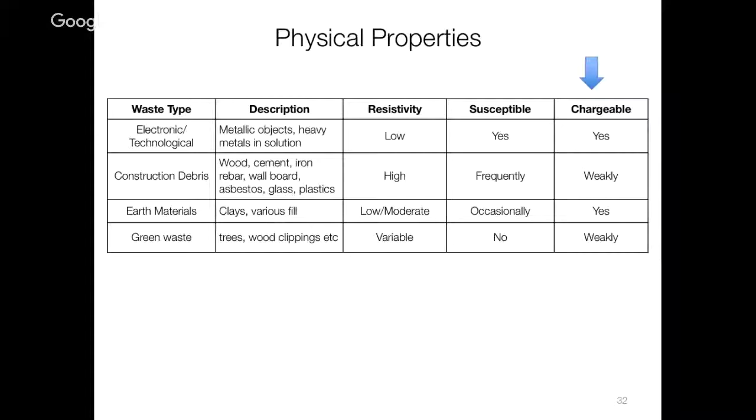Magnetic susceptibility is a little bit all over the map. If you've got scraps of iron, or construction debris from rebar or metallic material, then magnetics is good, but for earth materials and other stuff, not necessarily. But the one thing that's come up over the last couple decades is that most of these materials could be chargeable, either significantly or weakly, relative to the country rock.

So these slides were actually taken from a leading edge paper by Zonge Geophysics, and the only purpose for them is just to show what the images are like. We talked yesterday about pseudosections and going from pseudosections back to recovered resistivities.

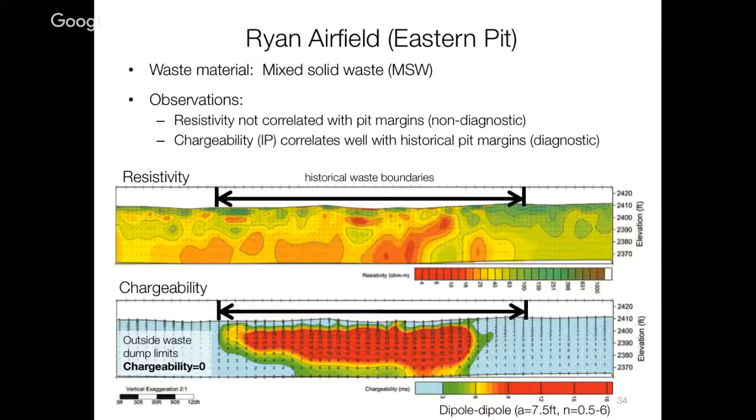So the point is there's chargeable material up here, but it might not necessarily have a really low resistivity - there's not a one-to-one correspondence. The only thing that's known here is the limits of the waste dump, and here's what you get in resistivity, and here is the IP. The fact that the IP is kind of coming up close to the surface is perhaps good. That was one with mixed solid waste, and this one's got construction debris.

They wanted to do test drilling to see if those readings were correct, but they didn't want to actually drill on any place that had chargeable material or that they thought was waste, because they were worried that just putting a drill hole through might contaminate things. So they thought it was kind of interesting. They took these images and drilled right beside, hoping not to see anything, and they didn't. So there's chargeable material, but it's not here.

The first time I read that, I thought, okay, what's that? Seems like a hard thing to sell to someone. Yeah, we drilled exactly where we thought it was, and it wasn't there. Yeah, that's a good job. I'll pay you double.

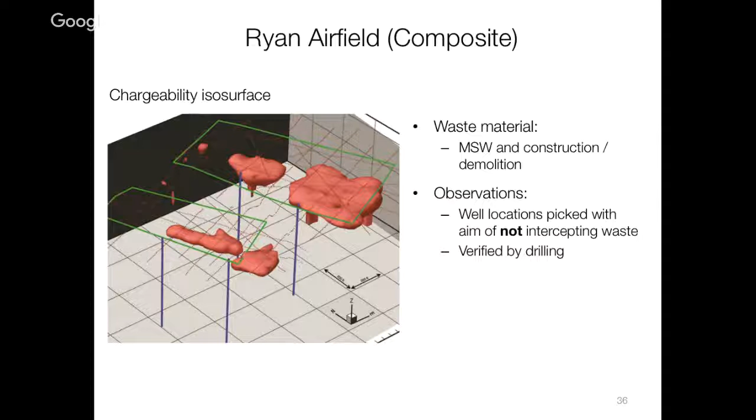So here's another example, and actually this type of example we see in a number of places. Basically what you probably had was a flat area, maybe a hill, and then they just kept dumping stuff in as time went on, and you end up with a final topography that looks like this.

The color scale is resistivity, so the red is low resistivity. You can see there's low resistivities here, and low resistivities out here. The contour levels are the chargeability, and you can see that it's coinciding with this region. You can see smaller stuff out here.

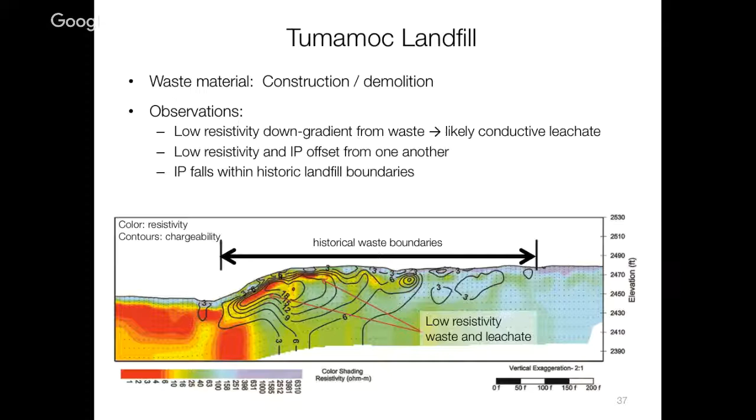The point is that the historical boundaries of the waste are nicely delineated by the chargeable material, and all of this low resistivity up here is not chargeable, and that is very likely the leachate. What happens is you get stuff that's here, water goes through, takes out a lot of metals, and brings it down here. This is the stuff people are really worried about, because it's potentially going into the water supply.

And then with the case of organic waste, resistivity kind of showed that up, but it still had a bit of a chargeability signature, which is kind of interesting. Why are leaves and organic waste chargeable?

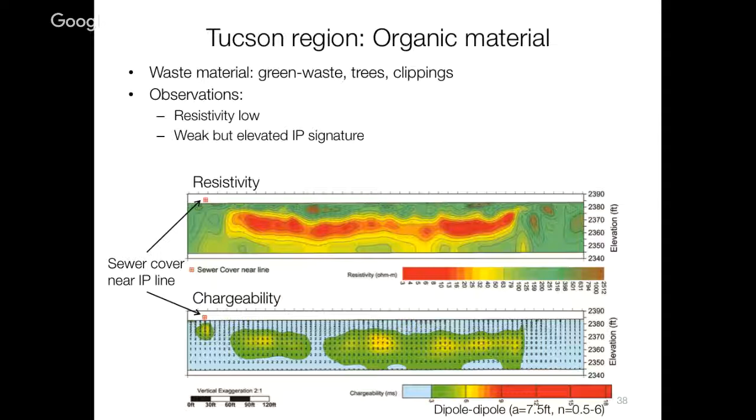So I'm asking, it's not the pore fluid that causes the IP, but it needs to be the material in which the pore fluid is that causes the IP. You can have restrictions like this. Right, it's a combination of the fluids and the matrix. But the contaminated fluid wouldn't cause IP by itself. Right, that's great. What's interesting with the chargeability is that it's such a defined cutoff compared to resistivity. It's really is or isn't, versus higher or lower resistivity. And that's really the take-home point here.

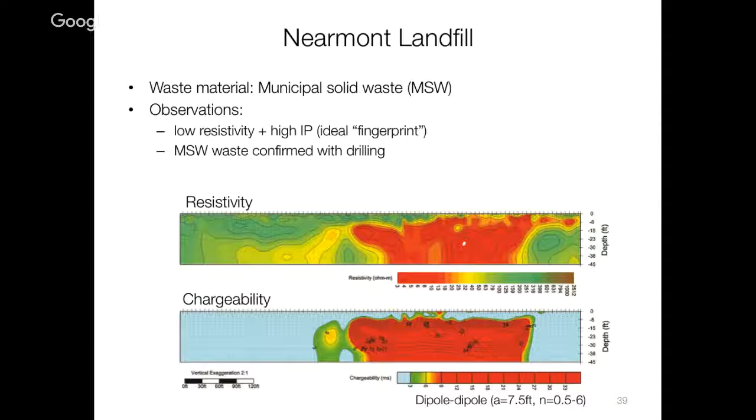Here's one that's probably kind of like an iconic example. This is what people were looking for, right? So the waste was over here. Don't have that one, and so it's low resistivity and chargeable, and they coincide. Somebody was mentioning about having to do monitoring, was that you for the landfill?

Yeah, so here was an example with municipal waste. There was a 2003 survey, and this is the IP obtained when they first started to reclaim the area. So that was the initial IP, and then they did a 4-year biodegradation program. They had air sparging and different kinds of things they were trying to clean the place up. And I think it was 2009, two years after the remediation, you ended up with a chargeability section that looked like that.

So that was kind of nice. From the point of view of monitoring, perhaps even a surface IP experiment done over time can help you see how well you're doing.

What would have been the reason that it's less chargeable after the treatment? Well, that means whatever treatment they're doing is good, right? I think they were maybe flushing stuff out, gradually getting rid of the concentration of dissolved material, removing small things, so the solids stay the same. And IP is associated with the solids somehow, with the matrix.

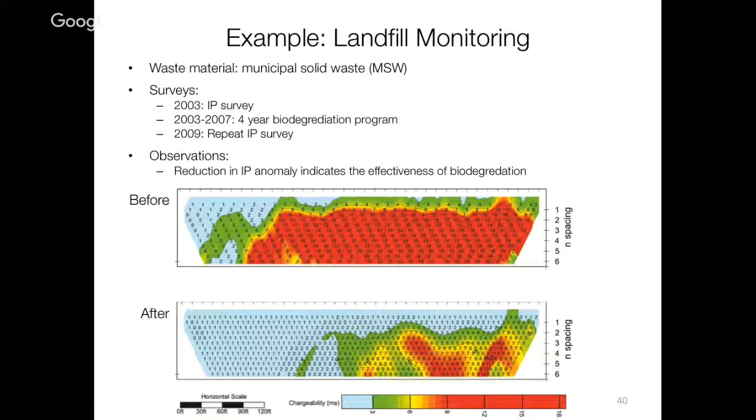So I think it's actually probably fairly complicated when you really look at it, but these are field measurements, and the thing that comes in here is that if you just look at face value as far as resistivity, sometimes there's a correspondence with the waste, sometimes there's not, sometimes the material is high resistivity as opposed to low. So it's an indicator, it might work sometimes, and it has worked. But the IP just seems to be a more consistent thing for a whole bunch of different kinds of environments.

Could you say you need charged particles in the pore fluid in order to have IP? Well, you always have ions in the pore fluid. So if it's polluted, you have maybe more of those particles than otherwise, and maybe that makes the difference. That's the difference in concentration. Yeah. That's a good point.

So now I think this next case history might kind of resonate with you. This is an area that was a landfill for 10 years, sort of 100 meters by 100 meters, and it was basically sludge from some waste treatment plant, with an estimated volume of about 65,000 cubic meters. But when they did it, there was no containment, no way to capture the leachate, no isolation of the system. They just dumped it. And the current state is that the landfill has got lots of iron, hydrocarbons, or organics.

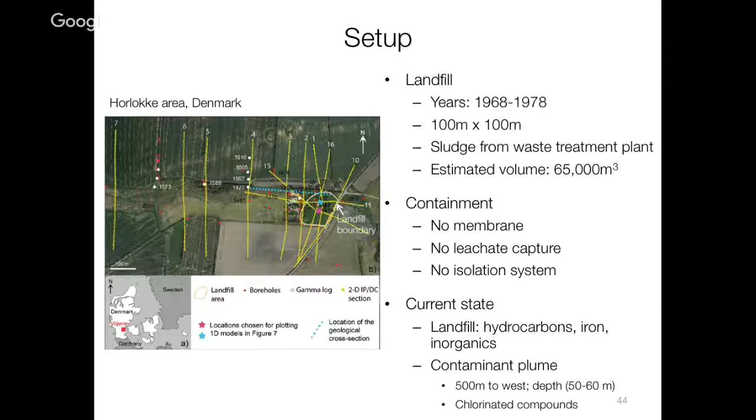So they've done a fair bit of work. They've got some boreholes in here, taken some gamma logs, done some DC resistivity, and the general setup, maybe there's parts of this that are kind of similar to what's happening in Poland. You've got sort of an upper clay layer in the top couple of meters, then there's a waste layer, and then sand and gravel kind of interbedded in here, and maybe some aquitards coming in.

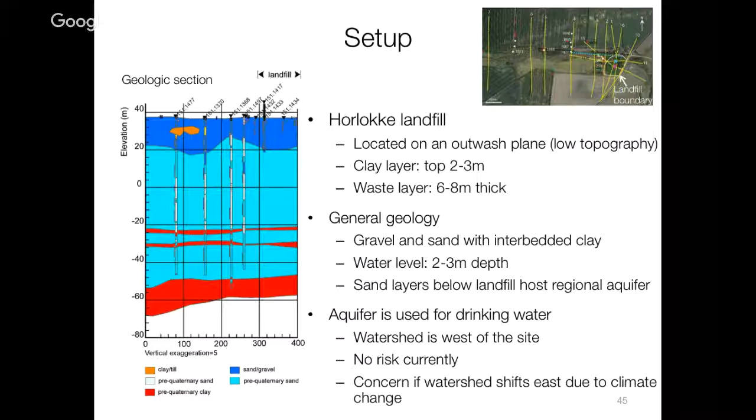So the aquifer itself is used for drinking, and currently the landfill area is kind of away from the area where they're extracting the water. So it's not really of concern right now, but their concern was that if the water table actually raised up, there might then be more of a connection, and a lot of the material associated with this waste dump could come through.

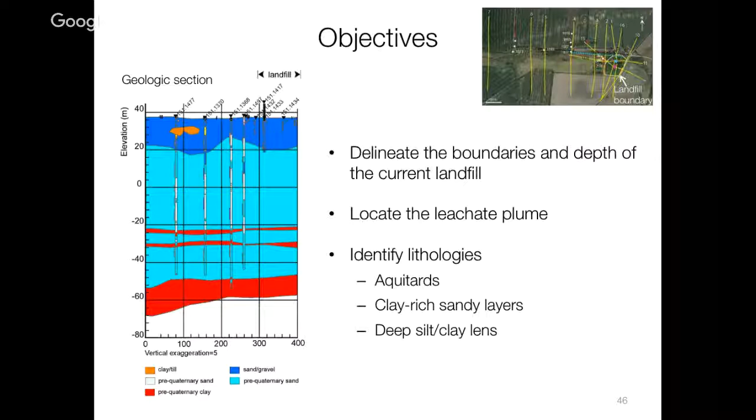So that's the objectives: basically delineate the boundaries of the landfill and the current depth, locate a leachate plume, and also identify lithologies of aquitards, clay-rich sand layers, and maybe a deep silty clay lens. So those are kind of the objectives, and the properties of these different units are given here. There's also a gamma log that was taken, and the gamma logs are basically associated with high values for the clays especially.

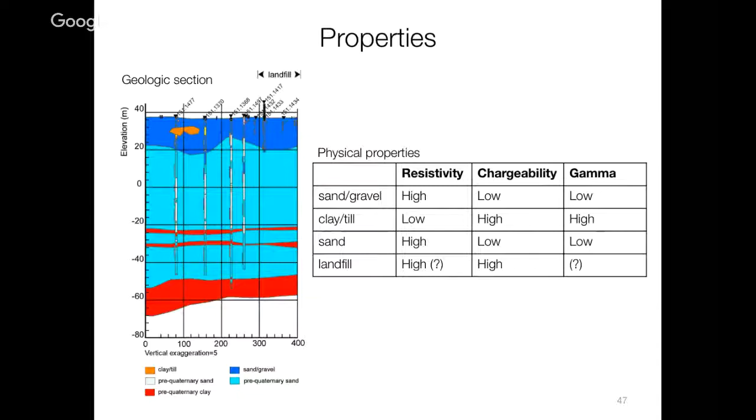The survey was a time domain IP, just like we talked about yesterday. So you put the current on, voltage rises, turn it off, and then this decay curve that's coming in, everything there is connected with IP.

The IP data that they used is an integrated value of this secondary voltage over time channels, and so that's their IP data. There's 11 lines of data, and 20 time gates per receiver.

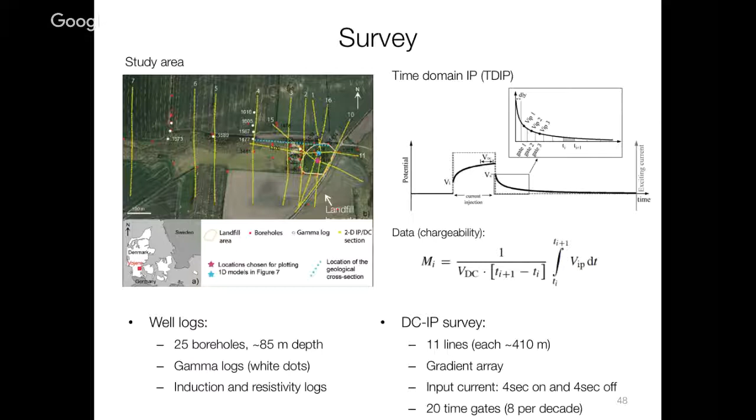So they had 25 boreholes, and there's a number of holes in here at which they've actually got the gamma logs. Any idea what the first time gate would be? No, they didn't say on that.

So the inversion and processing is done a little bit different than what we were doing yesterday. I was sort of advocating a two-step process, where at each time channel we invert each time channel individually, and we get out something, sort of a pseudo chargeability. Remember that curve where somebody asked whether that chargeability curve was typical or not? I said it really comes from a Cole-Cole model.

So here's a representation that's very common for the complex resistivity part. Rho naught is the resistivity at DC, M naught is the chargeability, intrinsic chargeability between 0 and 1, and tau is the time constant, and C kind of encapsulates the frequency dependency.

So this is the description of the complex resistivity, and you can formulate the inverse problem so that you have a number of layers, and each of these has got its own suite of parameters. So you've actually made the problem more challenging now, because now every cell has got 4 parameters associated with it.

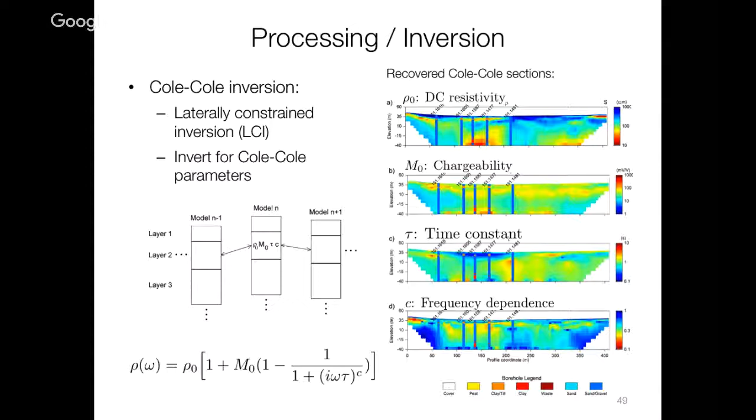The layer boundaries are fixed or also variable? They're variable, I think, too. They have... actually, I'm not sure. Maybe they might be part fixed, part of the inversion. Yeah, it's all part of it. Sometimes they set these problems up so the layer boundaries are fixed, and sometimes so the layer boundaries can move. I somehow suspect that these are fixed, because I think at some point I remember reading that they were doing 25 layers, which definitely would mean that they were fixed.

So you can't read that. The landfill area is this, and then there's basically four lines of data that go through there, listed up here. The important point is that as these lines go through, the data is inverted, and here's the chargeability section obtained through one line, another line, another line. And these arrows indicate, from a historic perspective, where the boundaries of the waste dump were.

You can see that the inversion for the chargeability has done a pretty nice job in delineating that. Now they can interpolate the chargeability section and get sort of a 3D representation. And then you could use a cutoff value, which they used here, 100 millivolts per volt, and that gives them this as an estimate of the volume of the waste.

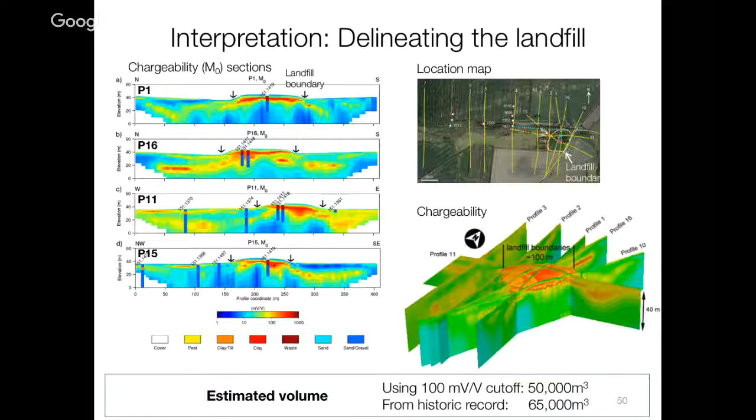And actually that number came up kind of reasonable, like 50,000 cubic meters. Of course, that will all depend upon a whole bunch of things, what the isosurface level is and stuff like that. But as a first shot, that was actually a pretty interesting comparison. So that did a good job on locating and finding the volume.

And then there was the aspect of interpreting the different lithologic boundaries. So the first one is a clay layer. Clay has got a low resistivity and a high chargeability and a high gamma.

What we see here on the resistivity section is, the blue is really high resistivities, and the red is low. So if you look in the top region, you see that it starts off blue, and then there's a conductive or low resistivity layer right in here, and that layer is also chargeable.

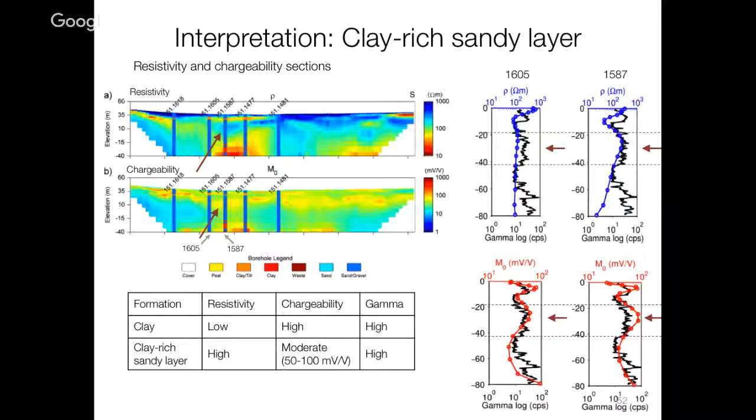M zero and the gamma. Interesting.

I don't think so. Yeah, because the gamma - these two holes are next to one another, so I don't know the interval between them, but maybe not so much. 1605 is here, so it's sitting up, and then 20 meters away you have the other one, and if you look at the gamma you'd say, oh, that's the same clay layer.

Each of those ticks is 50 meters on that axis below. Yeah, actually see that, so it's 20 meters in between. Something like, it's the same clay layer, you would say, for sure.

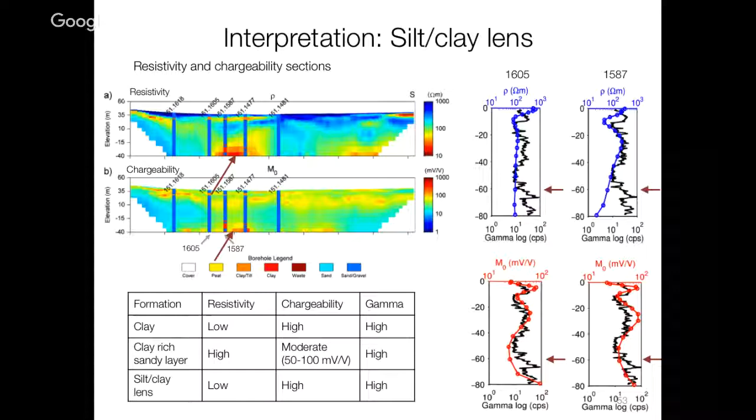So this is low resistivity, very low here, and high chargeability here, okay? But above here, the chargeability gets less, and above here, resistivity is also a bit higher, but it's still pretty low resistivity.

The point about that might have some physical meaning, I think, encapsulated in this diagram they put through, which is kind of a cartoon of what's happening. So here's the waste, and then there's that upper layer here, that clay layer, and they've listed that as an Aquitard. The only reason they gave for that in the paper was that we've got it as a clay layer, and there's a stream up over top of it, so we're thinking this is an Aquitard. I don't know if that's sufficient, but that's basically what they said.

So they listed that top clay layer as an Aquitard, and then they've got this clay-rich sandy layer coming in here, and a clay lens at the bottom, okay? Now, in addition to that, there's this pollutant, this contaminant leachate that's coming down, and it's being truncated by this clay lens, and then it's moving up here.

If that cartoon is true and we transfer that to here, then we'd expect to have higher conductivities or lower resistivities going outwards, sort of above the clay lens, which maybe is a bit more reflective of what this resistivity here is compared to that. So at least from the point of view of a story, which I can't elaborate since it's not our work, everything kind of fits together.

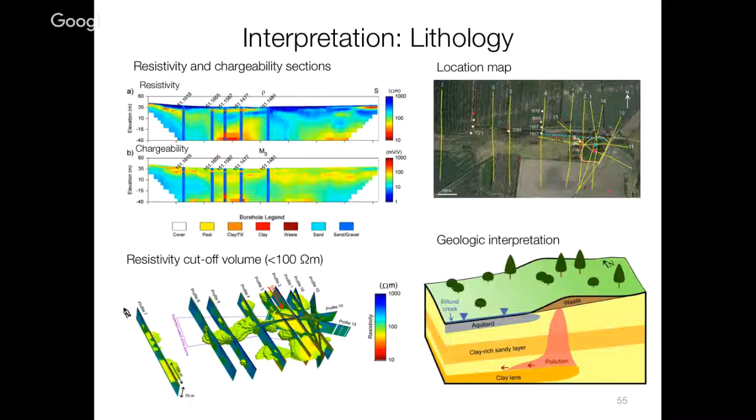The waste dumps are right here. The next slide has taken this same thing and plotted it out on a section. This line coming through here is a section on which they've drilled a number of holes - profile 4 lines right in here. The scale is a bit hard to read in this room, but this shows the highest value of the chlorinated compounds sitting there, and that matches pretty nicely with this.

So they've drilled through and evaluated the amount of metal ions in the fluid. There's a lot of them at a depth that matches where we are here. So part of that plume is definitely the leaching that's coming up.

So I think that's good, right? This is a seriously tough problem, and they managed to go through. They've certainly got the first.

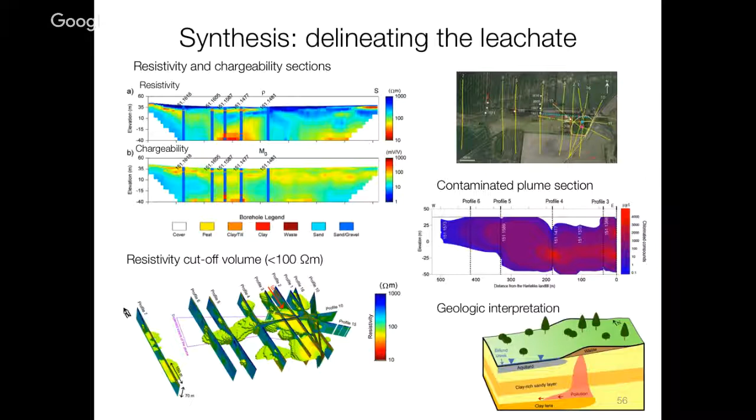I think the first aspect, trying to delineate the boundaries of the waste and the volume from the IP, has been really stable. The delineation of the leachate plume I think they've made just by looking at that high conductivity, low resistivity coming out from the waste dump site. That's probably a pretty good interpretation.

And then their assessment trying to simplify the geology into sands and clays into something that matches the gamma ray, the chargeability, and the resistivity - to me that seemed to be one of the nicer stories we've seen with respect to the use of IP. So I think IP has definitely got a real role to play here.

In landfills, it would be interesting if they could indicate when a repeat survey would be useful - how many years from now would you do a repeat survey to see how the plume has moved? Well, I'm sure they'll do that here because this is an area they're actively interested in. It's now like a test site, so you want to go back and check what's happening.

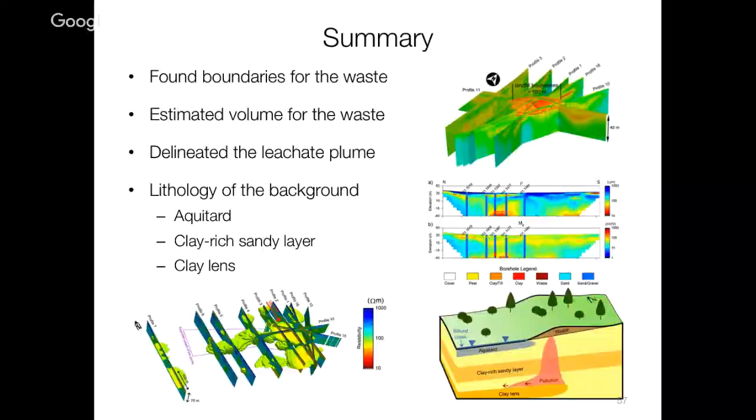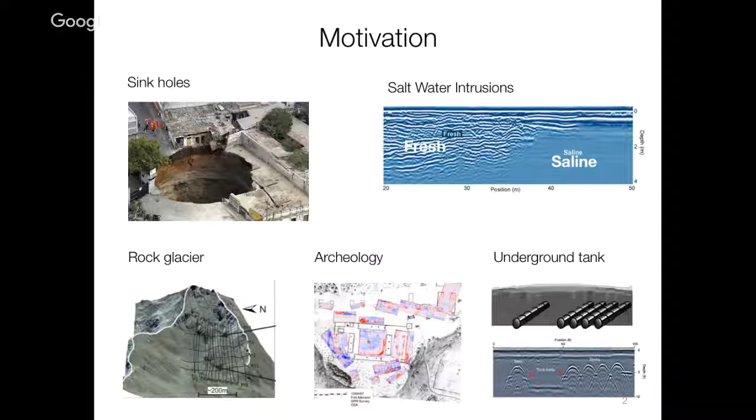Again, we always need motivation, in particular for GPR. It's basically shallow work here - it could be sinkholes, saltwater/freshwater interface, there's been applications for that. A lot of work done in very near surface engineering, geotechnical work, for finding underground tanks, archaeology - that's what we're doing - and rock glaciers. We have a case history on that, but I probably won't go through that.

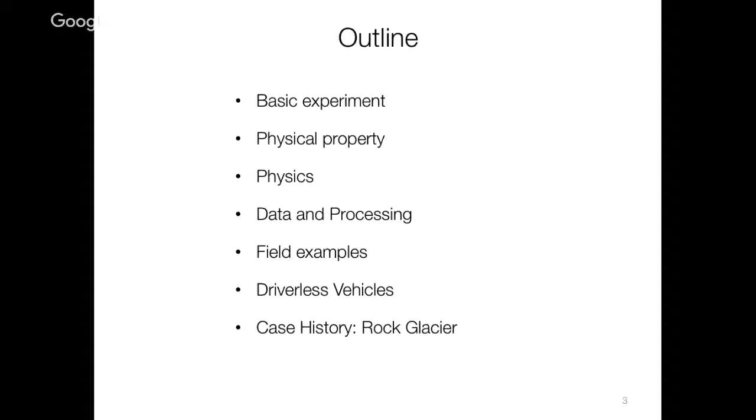So just to kind of briefly go through the basic experimental physics, a bit of data processing, not very much, pretty rudimentary, a couple of field examples, and talk a bit about the driverless vehicles - but it's small. Anyway, so this is the basic unit: we have a transmitter, receiver, so this looks very seismic oriented. In fact, all the pictures here could be a seismic instrument, and we've got rays that are coming down, they're reflecting off, there's stuff that's being transmitted, and in the end you're going to be plotting radargrams or signals that will look pretty much like a seismic section.

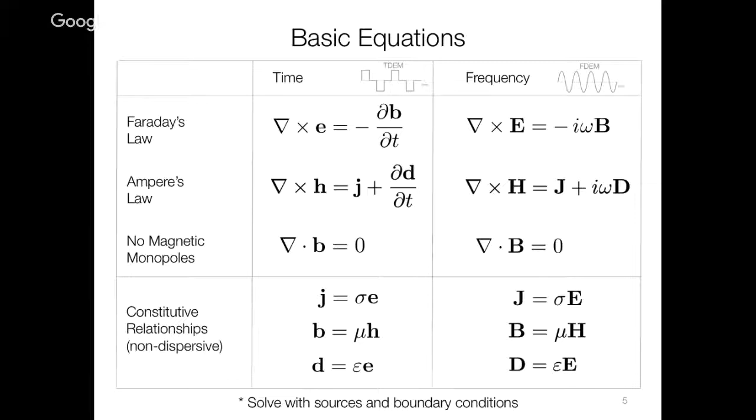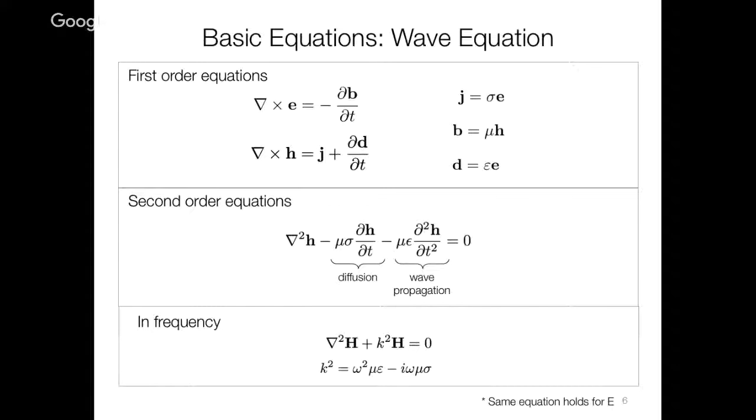So the basic equations we had yesterday, but now the thing that is in grade is this quantity here, which is the displacement current - this is really the wave propagation curve that comes in when you make a second order system. We showed this yesterday: take the first order equations and put them together, and now you get something. This looks very familiar to people in seismology. This guy here is a bit of an annoyance in seismology because it's attenuating things. But what we did, well, everything we did yesterday, because this is so big - basically sigma over omega is much greater than epsilon. This guy, as we usually ignore, but we're not going to now.

The quantity of interest is the electrical permittivity, and the velocity of the electromagnetic wave is the velocity of light divided by the square root of the dielectric constant. So the dielectric constant is really the ratio of the electrical permittivity of the material divided by the permittivity in free space. When you do that ratio, you get an epsilon, which we call the dielectric constant, and it basically varies between 1 and 80. Water is the big kid on the block, and it doesn't matter if it's freshwater or seawater, it has a high dielectric constant.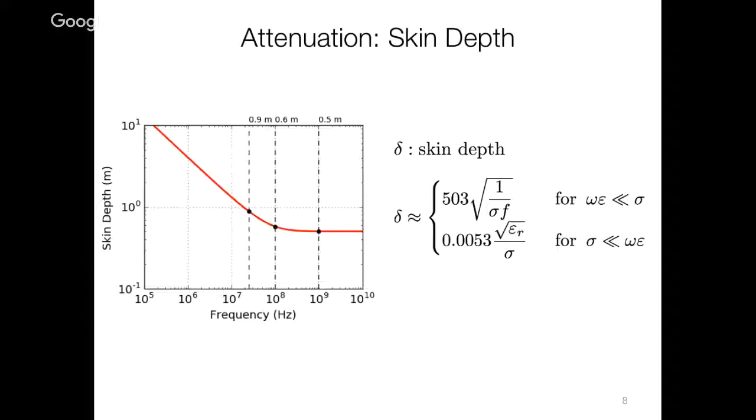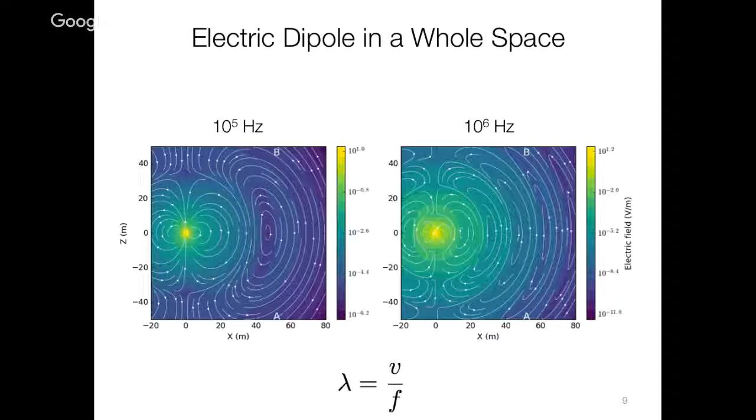Not in the same sense as Rayleigh waves or Love waves or things like that. I don't think so — it just doesn't. But I could imagine some sort of interface wave, like in seismic you have a slower wave, maybe something like that, but I don't know. No, I haven't heard about it. I haven't heard of anything like that. It should be, or it can be — maybe that's low amplitude. No, interesting question.

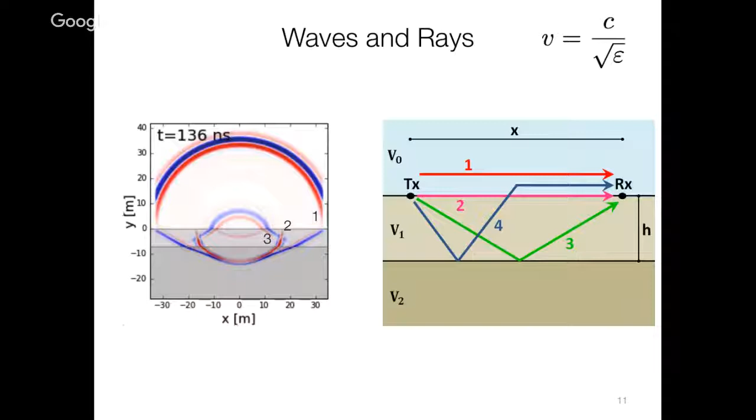So we've got these different ray paths, and you can kind of see what the associated wave front is. But the funny thing is, if we do this for full elastic wave propagation, we get surface waves. I'm curious what the difference is. If we make a movie like this, you can see the surface waves in full elastic modeling. Right, but we don't have particle motion — well, particle motion is like a field.

Something like some components should be zero from the bottom. Yeah, maybe that's the case. It's simply the layer boundary. I don't think... I don't know, we'll have to check. Is there any such analogy here?

For processing, because you're working at such high frequencies, hundreds of megahertz to a gigahertz, even if you're pulling the instrument along, it's recording thousands of realizations of your signal at each time. So you can afford to do a lot of stacking, and that allows you to gradually beat down the noise in favor of some signal. So that's a big thing.

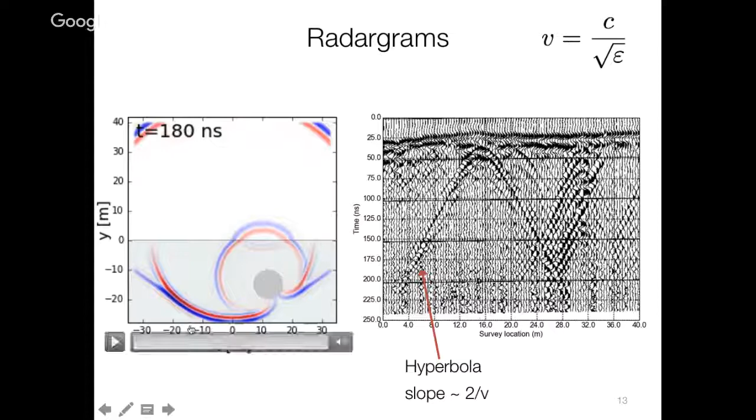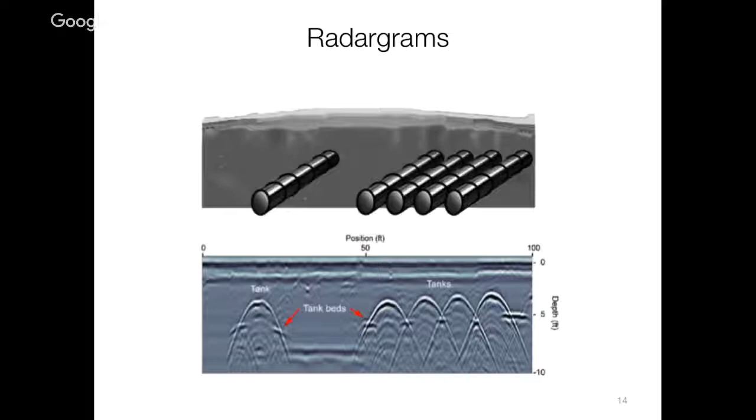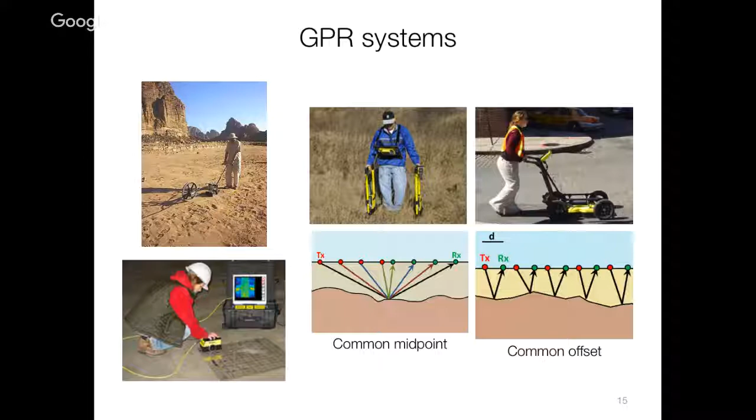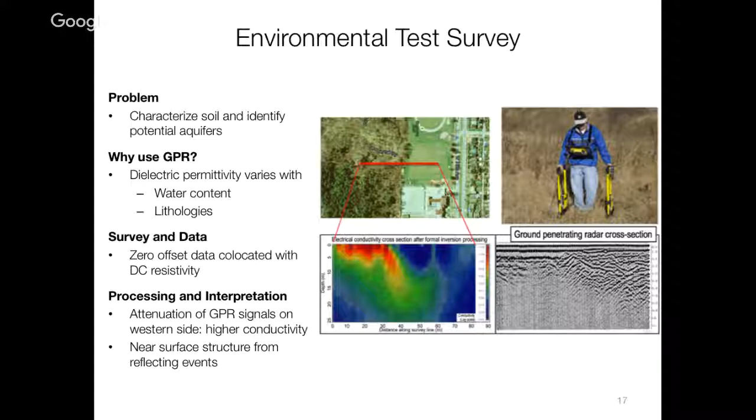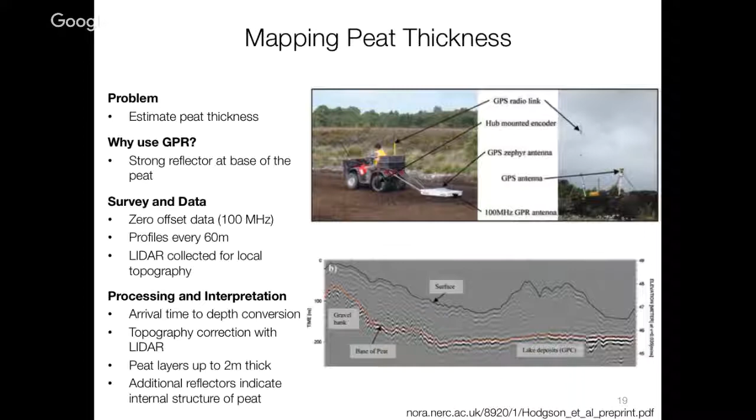Is it still? Yeah. Oh, they still go and dig peat and burn it. Number one source of heating. Not in Northern Ireland though. Carbon footprint, yeah I know. It's not for the whiskey then. Probably also, ah yes, now we're talking. Good, nice smoky whiskey with that Scotch.

Here's one where it was used for water sensing. This is a potash mine in Saskatchewan. You're always worried about water coming in from the top, right? So you have to do the experiment where you put the radar unit sort of up on the ceiling, which interestingly enough, they call the back. It takes a long time to figure out what that was, but yeah, put up on there.

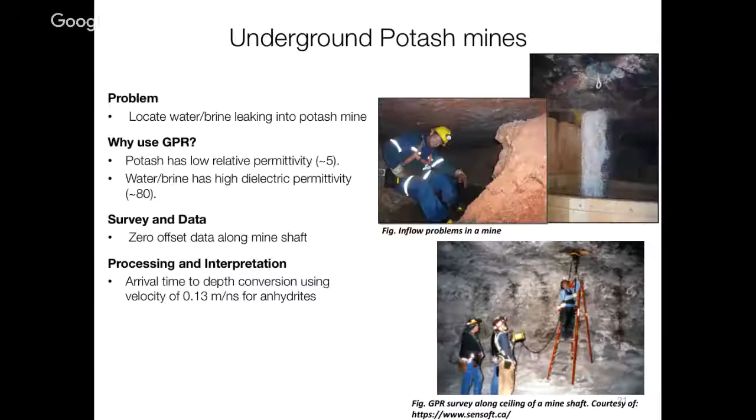So that was it. Oh, I showed you this the other day, but I just thought this is so cool. It's actually one of these things that I think are really important for connecting with the average guy on the street as to electromagnetics. And yeah, it just kind of resonated, and I wanted to show it.

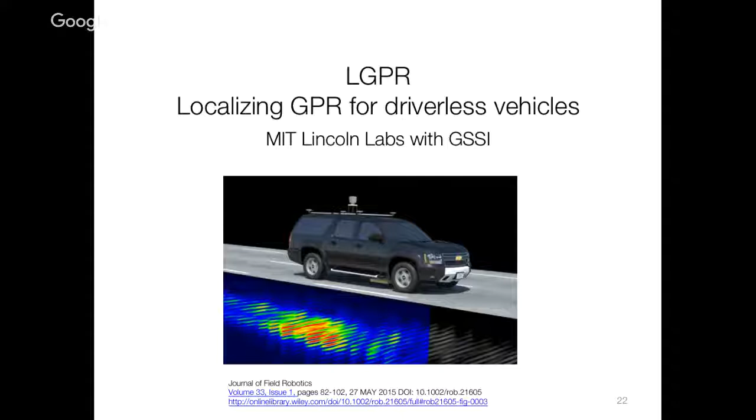So the idea here, this is work that was done at MIT Lincoln Labs - they're concerned about what sort of sensors can be used for cars, especially in bad environments. Here's a bit of an older picture, a bit of an overkill, but here's the car, and you've got where the car is with respect to everything else. So you've got a GPS, you've got a LiDAR, you've got a camera, and these things actually work pretty well in good weather.

But in bad weather, when it's rain or sleet or snow, or something unexpected has come in, something's been changed, or even if somebody is running out, if something has been changed, you might be hard pressed to make sure you know exactly where you are. So the idea was, okay, could we get another sensor? And the question is what you could do as far as having something that doesn't change with respect to those weather conditions.

So the system they got - this is that MIT truck, and there's a GPR unit sitting underneath here. The idea is to do this in two parts. You have the GPR system there, and then you run the car over the road, and you collect basically a radargram of what that road looks like in good conditions. So you collect these data and store them as a reference data set.

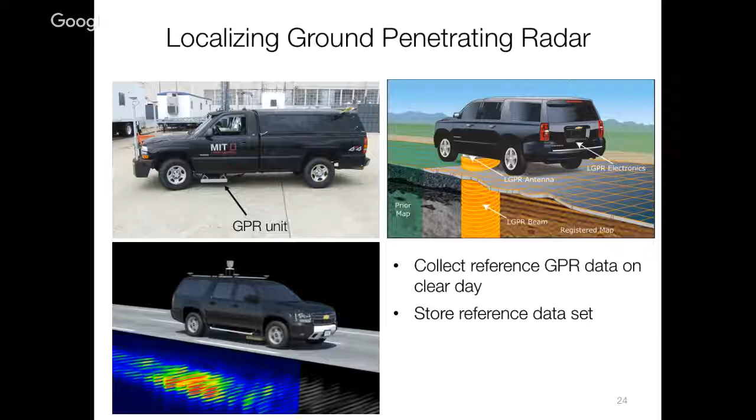That's your test data. So now you come along with your car in rather poor conditions, but your optical sensors are not working so well here, though you can still see into the ground. It's shallow, but you can see down, and that region is not really affected by rain or fog. So now you get this radargram coming in, and you do a cross correlation of this signal with their library signals to find the northing and easting location with the highest quality correlation, and then you know at this particular moment in time I'm really at this spot here.

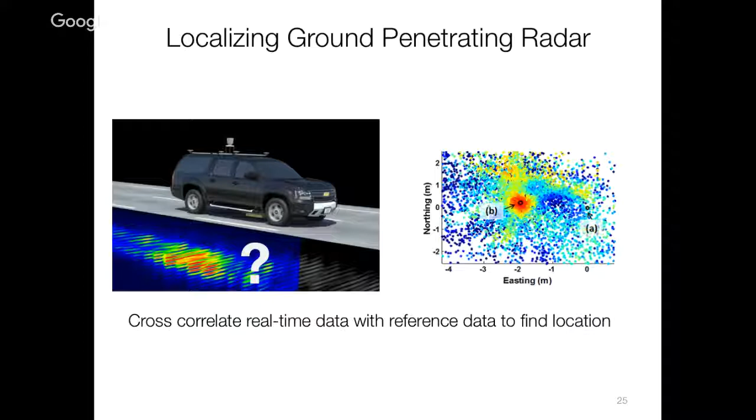Were they able to drive just on that data? So to drive along a certain stretch of road just on that data alone? Next application—like, I understand the principle, but is...

It's great to collect the map of the road. Yeah, it's great for civil engineering, infrastructure monitoring applications. But my question is...

When there's sleet, there's also salt spray. Yeah, so I was wondering, it's a bit of water, or it needs salty water. But they would be looking for the part of the radargram that's deeper as a correlation, hopefully, and that still remains high correlation with the reference library. Yeah, you can get that deep. What's this? Yeah, I got it.

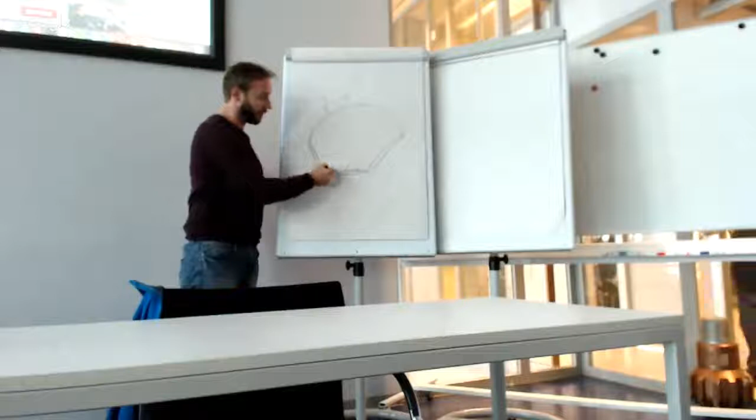It's basically a hole in the ground where waste is filled and then covered on top, so you get a bit of a hill. In the Netherlands, in these landfills, they first put in an impermeable layer. So all the rainwater coming in fills up with pollution, producing leachate, which is collected here in drainage tubes all the time because we don't want to pollute the environment.

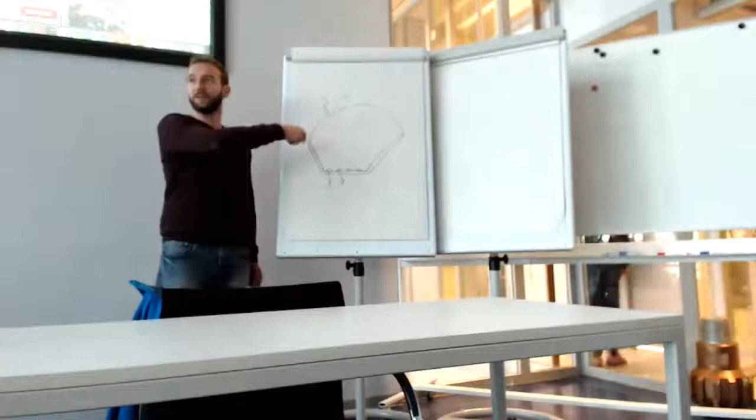Only, this leaching process is very slow. So the way it looks now, we have to collect and clean this leachate discharge for the next 50 or 100 years. So we want to clean the landfill up quicker with treatment methods, so the leachate is clean and we can just release the landfill without having to care about collecting this discharge.

And you're saying that this was actually put together like 30 or 40 years ago, with the liner put in before they start filling? It was in operation for 10 years, I think, and then they closed it off. There are many of these types of landfills in the Netherlands lying around that need to be treated. That seems progressive, at least from a North American standard, that you'd actually put a liner in and pipes to get rid of the leachate.

Well, they incinerate all the waste now here, so. Yeah, now they even go further - the landfills that incinerate were made 30, 40, 50 years ago. They don't have drains, etc. But that's a whole different kind of problem. You have also many landfills without drain systems, but these types are also already 30 years old or so, I think.

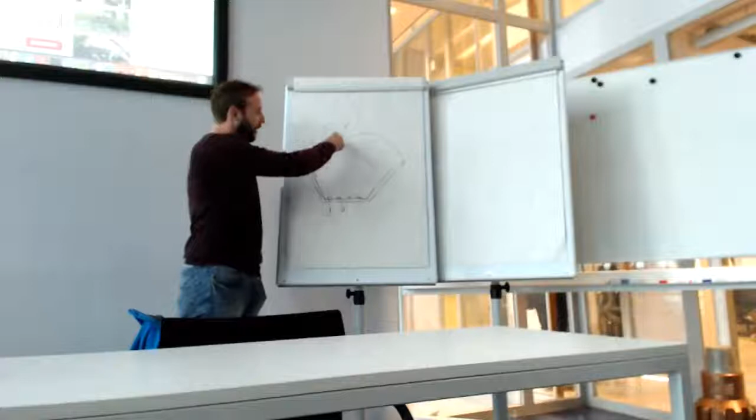And what they are now planning to do over the next 10 years is apply two types of treatment methods. They drilled holes in the landfill and are going to aerate the system, introducing oxygen to enhance the biodegradation and enhance the leaching, so that the organic matrix is cleaned up faster.

And in some landfills, before they start doing that, they will recirculate the leachate. They put it back on top, it funnels through, and the leachate is actually treated in the waste itself - it's really degraded. So in some of them, they first do leachate recirculation and then start the aeration. In other ones, they start the aeration immediately.

I've been working on modeling this type of behavior for my PhD - how the leachate loads up and what kind of leachate you get over time. We developed a model based on the hydrology and the biodegradation inside, which predicts in time what the leachate quality will be. It's important, of course with certain uncertainty, to have these models to be able to at least indicate that the leachate quality will remain low after the treatment period.

So we want to improve this. We have a basic model, but we want to reduce the uncertainty in the modeling, and therefore we need more data. That's why over the next 2 years we want to focus on getting more data through ERT or DC measurements and DTS measurements - the other one is distributed temperature sensing.

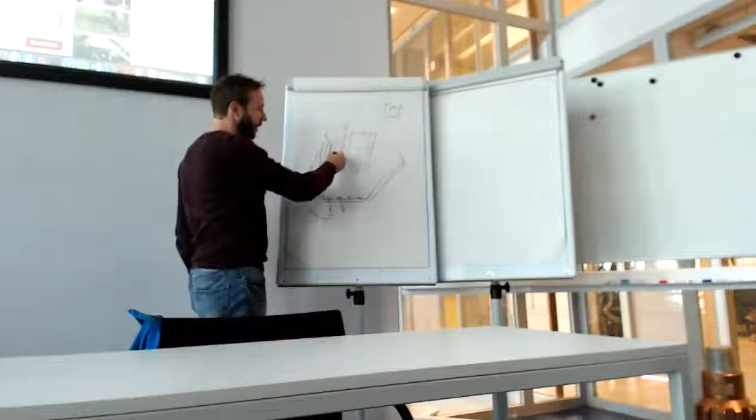Because one of our main hypotheses now is that the water that goes through funnels through preferential flow paths. You also have zones where water is retained, more or less immobile water, where most of the degradation takes place, and then you have an exchange of compounds from these bigger immobile water regions towards the faster flowing water. That's also one of the bigger uncertainties in modeling, so we would like to have methods to map how the water flows through the landfill and where the bigger immobile regions of water content are, and which are more dry regions in the landfill.

So yeah, over the last half year we have been installing these electrodes. We basically now have a grid per pilot - we have 4 pilots where we just have, yeah, here you have the boreholes.

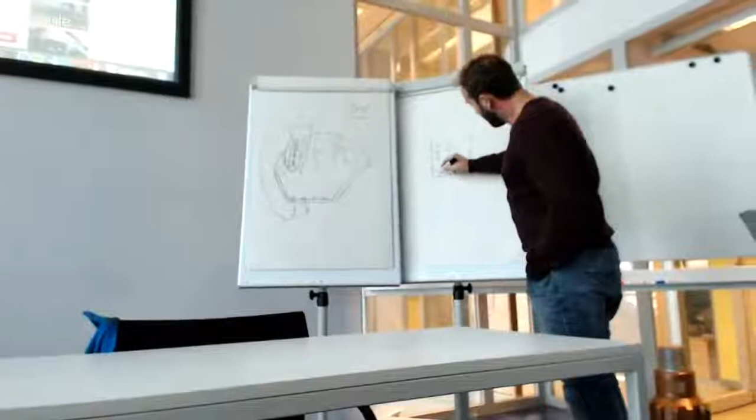We have electrodes every 2 meters. The depth of the landfill is on average 16 meters. That would be very deep for...

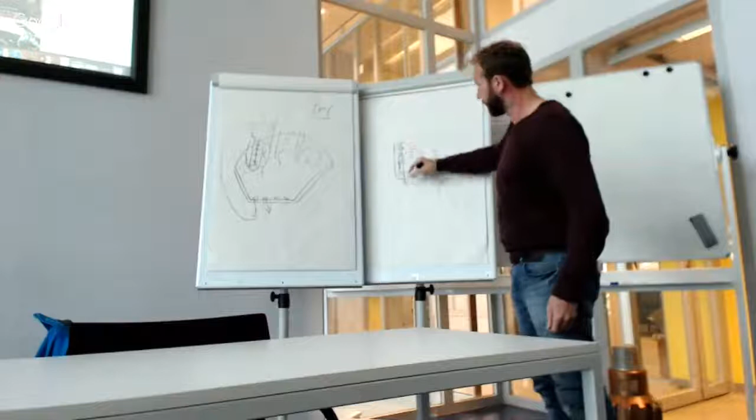We installed optic fiber connected through all the wells, so we can measure the temperature over the whole cable at once. We are now trying out test measurements for the ERT, so we lay a surface line along one line of boreholes, and try to do a spacing of around 2 meters with surface electrodes, connect the whole line and try to get images. But we're still trying to find the best DC or maybe IP method to capture water content.

So the electrodes in the boreholes, are they going to be used as currents or just voltages? Yeah, they can be both. Is that what you're planning?

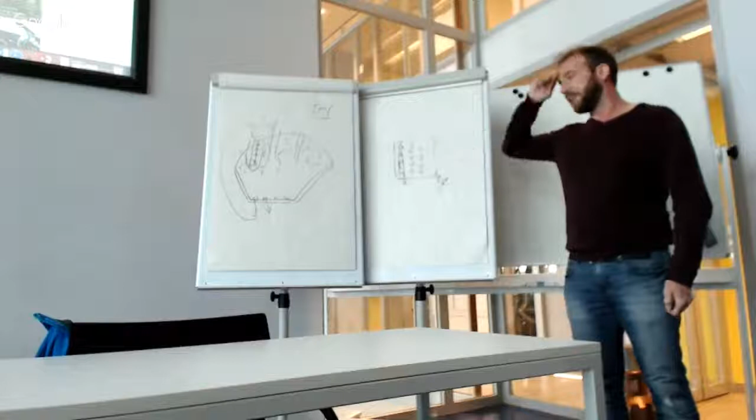It seems to us that intuitively, if you can make sensors with a pair of currents and a pair of measurement electrodes, and scramble it around through the whole system, you get a different current mapping density, let's say. So you get more and more information, but I don't know if that's feasible or realistic.

So are all your electrodes hooked up into a single circuit so that you could fire things off, measuring the potential between two electrodes with another two electrodes being the currents? Yeah, that's something we have.

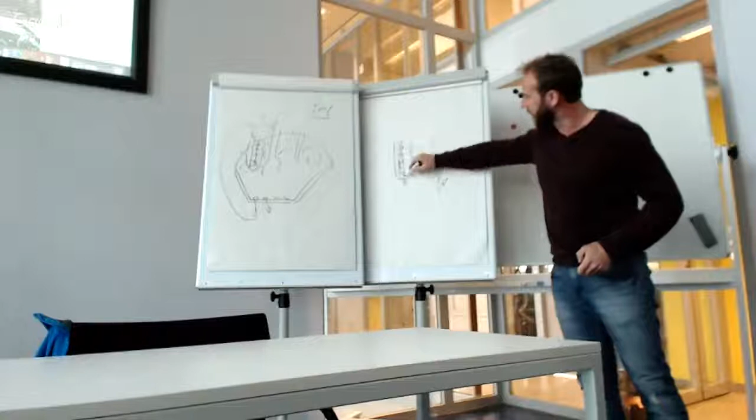We can connect 196 electrodes at once, so we cannot do the complete field, but one line. We can hook up all the electrodes at the same time, and then you activate 4. A master student is working relative to that, keeping it simple.

The master student has been working on trying to find the right combination of injection and measuring points. For now, he keeps one pair of current electrodes, and picks 10, measuring different points, the voltages. Then he does it at many different points, picks another injection point, and measures again.

We're still exploring, since there are so many possibilities. There was a lot of work done on monitoring CO2 in Germany, monitoring the CO2 plume with borehole electrodes, with a lot of assessment on the best configurations for monitoring this plume movement over time, over years.

Florian Wagner is the guy who was doing that work for his PhD. He was a student of Hansruedi Maurer, and now works in Bonn, I think. You will meet him there, and he will have a lot to say about the best configuration, since that was part of his PhD.

That's probably the same kind of configurations. They had only 4 wells with 20-something, 30 electrodes per well, deeper, 900 meters or 600 meters. But they were able to map the movement of the plume over time with the method - the same sort of application. I will definitely take a look at that.

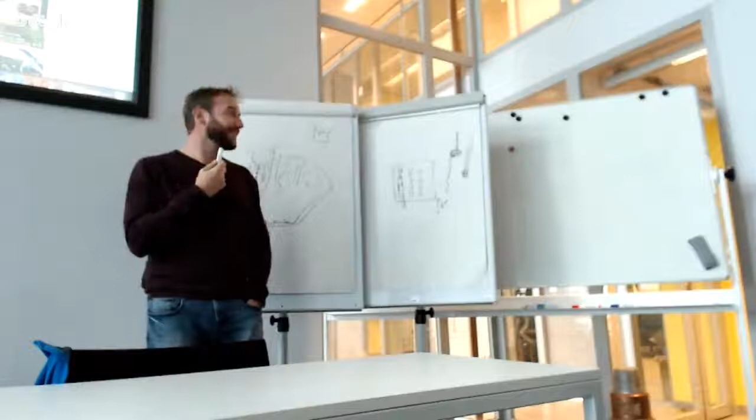I think in Ketzin, when they were doing the CO2 injection, they didn't have a lot of problems with corrosion there. Most electrodes after 4 years are still working fine. So I don't know, it's leachate, it's quite reactive stuff. Maybe it's not a problem.

Just to be sure, if there is a concern with respect to using an electrode as a current electrode, and then soon after using it also as a potential electrode, you sort of need a certain time for the electrode to calm down a bit, because it's charging itself.

So when we talk about monitoring the quality of the leachate, what do you actually refer to? Is it just the number of total dissolved solids, or what is it? How do you know when your leachate's clean?

From the government there are certain regulations about the highest concentration that compounds may have in the leachate before they enter the environment and groundwater system. For most compounds that's okay, they are below this threshold value, but some are way too high, so those are the ones we are targeting. For instance, the chloride concentration needs to be diminished, and the ammonium concentration is too high.

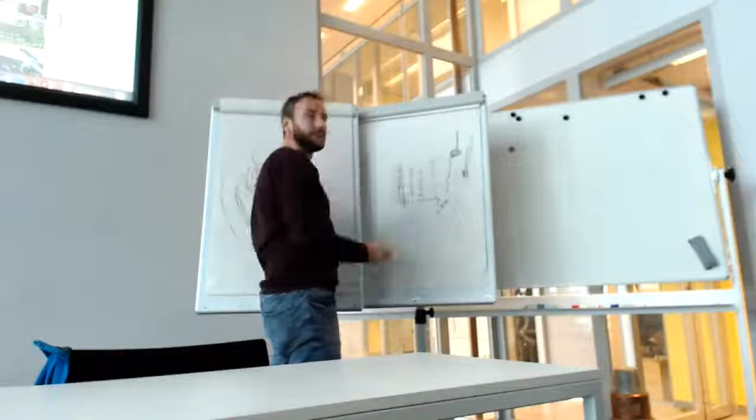So how do you get rid of the chloride through leaching? There's a certain pool of chloride inside, and if you just supply enough fresh water, then you leach it out.

In this phase we can still capture the leachate and then treat it, and you're going to keep recycling it, right? So how do you eventually get rid of it? There will be a bleed stream and fresh water will be added. It's not before it's pure that you put it back in, you're cleaning the leachate effectively as you put more in. Or we take something out and dilute it a bit on top. It's not 100% recirculation.

Any plans of using other methods to know exactly what's in there, as best as you can? Because part of it is modeling, you need to know what's in there. There are not that many methods which allow you to look into the landfill.

While they were drilling, we also took solid samples. We will analyze those, but those are 35 boreholes on 5 hectares. So is there any suggestion on what sort of method you would be using? IP or GPR?

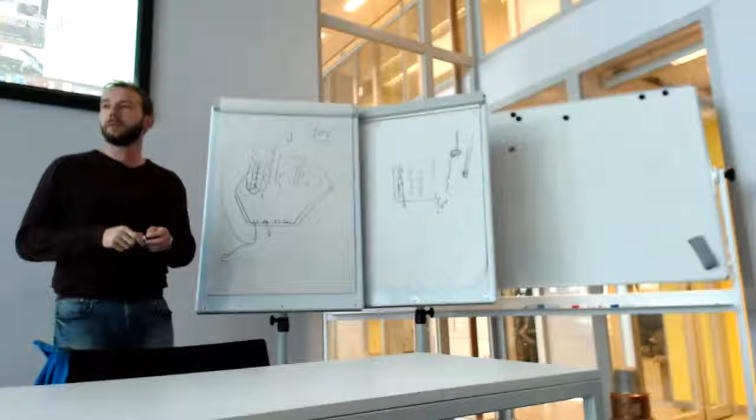CPT tests. The equipment is improving, now they are able to put more and more sensors on CPTs. Magnetometry sensors, cameras, light, and CPT testing is fairly cheap in Holland at least. That's the penetration test. The penetration test itself can give you information, but also if you put a magnetometer sensor on it, it can give you information. Things are developing more and more, and it's relatively cheap, because if you do destructive coring and take samples, that's pricey.

So that might also be interesting, if it's not too expensive. It gives you more information, it won't give you the solution or make your model exact, but it's an extra layer of information. It would be very interesting if we do this and get something out, and then do an additional round of CPT tests on different locations. That might be very interesting.

So what do you think the conductivity of the fluids are, the heavily contaminated leachate fluids compared to the general groundwater that you're pumping in? I think we have on average 10 millisiemens per centimeter conductivity.

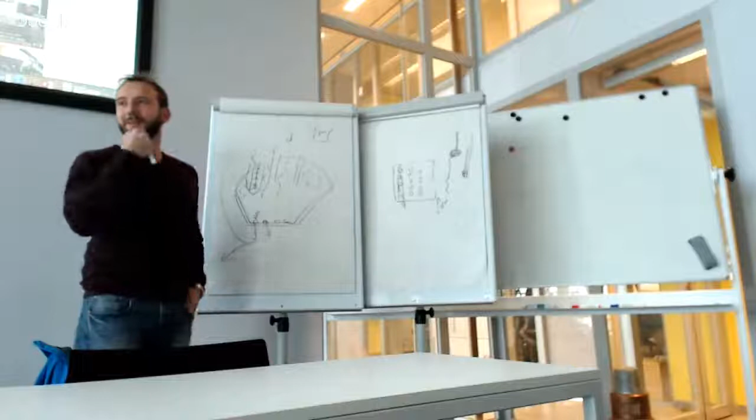At least 16 meters depth, you should get a reasonable resolution, I reckon, or not? Well, you've got boreholes - how deep do your boreholes go? About 2 meters above the base layer. But you're going to get a lot of coverage. The difficult part is that it's a very heterogeneous medium, so the inversion will be tricky because you have very conductive material.

What's the distance between the boreholes? 15 meters.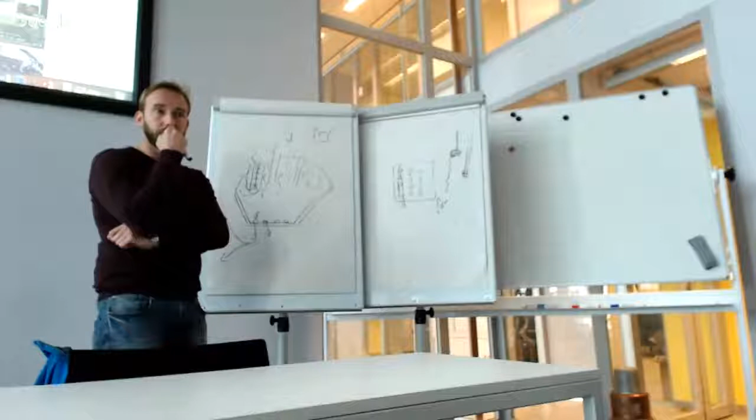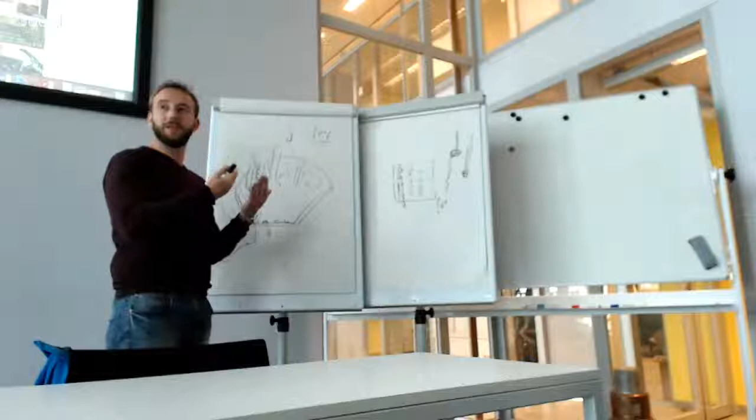But from the point of view of determining how well you're doing with respect to reclamation, it's really a time lapse approach. There are some complications that come from using time lapse, using differences. Yeah, we're thinking about that too - it might help, especially if we have different pictures of saturation of the landfill. So if you have a dry period, most of the leachate is leached out and you have a dry landfill. If you measure the same waste after a heavy rainfall event, you should be able to get a different sensitivity.

If you consider the OHM mapper by Geometrics, it's a long cable - 10 meters or 20 meters - with transmitters and receivers to measure your resistivity. You just pull the cable along. You don't have to put stakes in the ground or whatever. You just walk with that 10 or 20 meter long cable along your landfill.

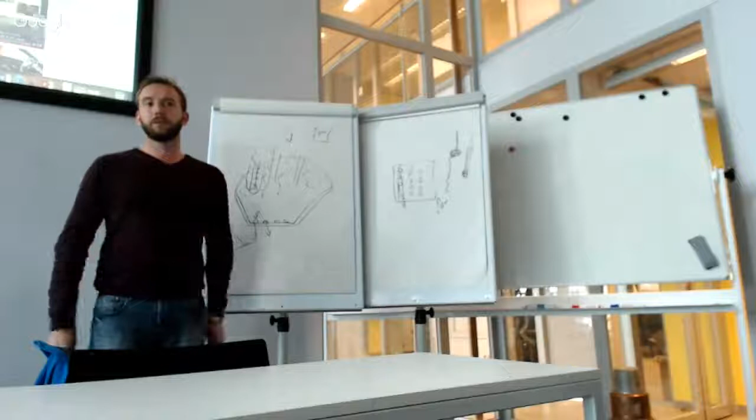Okay, I think that's nice. I'm not familiar with the depth, but... Well, the depth will be a fraction of your longest spacing, between your current and potential electrodes. I know in France, for instance, they use the OHM mapper for landfill surveys. I don't know what they were exactly looking for, but you could. It sounds really interesting.

Is it a DC measurement or is it - how does it make contact? It uses capacitive coupling to measure the fields. I don't know exactly how that works, but - you've got to need the... but how does it go into them?

Practicalities, more depth information maybe, of the operational aspects. Yeah, operational aspects. It's easier with these instruments that you don't... no, the OHM mapper is a lot easier. No, it's much heavier, so these are operational - well, that's not a problem. You're not carrying it, but for a surveyor it is, so.

It's enough. Are those fixed length? They're 10-meter long surveys. Can you make them bigger? I'm not sure. You should look it up, but I don't know.

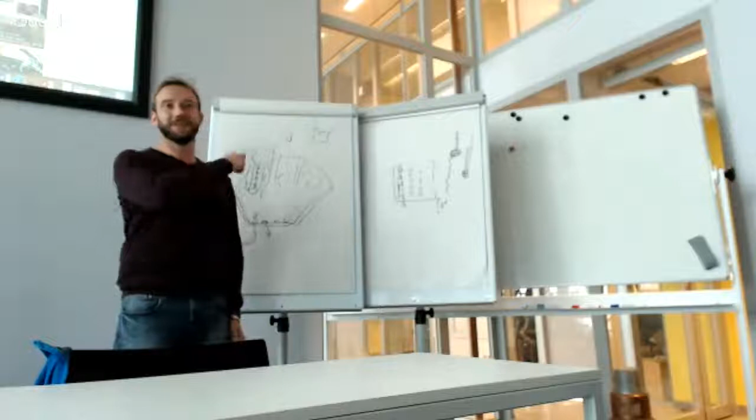But do you really want to, or are you applying just to put stakes in everywhere and leave them? You don't want to be repopulating. Yeah, that would be the nicest option, but we have a problem with mowing the field. Every half year or every spring they start mowing, so we cannot leave the pins in. Well, we can leave them in for a test for a month or so.

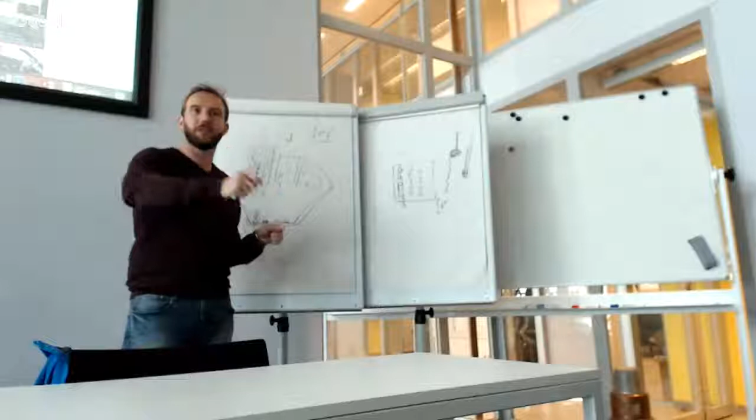And won't that, yes, there are restrictions of course in rummaging around with your isolation, with your caps. It's 3 meters of clay.

It's amazing with 3 meters of clay that the rain will penetrate into the landfill. Isn't the clay not completely clay? I'm not completely sure what precise the content of the material is, but it's... I think it's just earth. It's clay, yeah. You see the data usually nicely, when you have a rain event, a big rain event, and a couple of days later you have a lot of leachate discharge.

Interesting. Didn't know things like this happened in the Netherlands, even living there. Yeah, it's all in the background, that kind of stuff. Just trying to clean up for citizens.

And you said those are pretty common, like we've got quite a few of these landfills. Yeah, we're gonna do this on 4 pilots, but the whole project is connected to, I think, a couple of, 20 or 30, even more landfills through the whole Netherlands which have more or less the same system. If the treatment is successful here, the idea is to apply it everywhere.

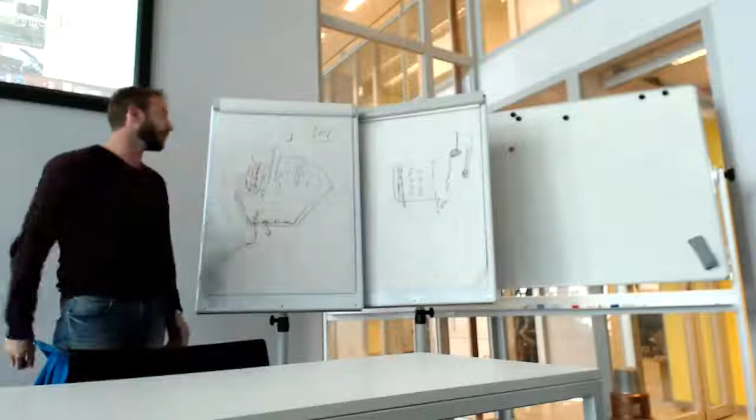What was the horizontal scale of this? The horizontal footprint at the top, how large are the areas? Yeah, well, the pilot area is 2.5 hectares, but that's only a part. So I think the total landfill is around 6 or 7 hectares, but I don't know exactly.

What's that translated to? So that would be 200 by 200 meters, I guess. Yeah, it's quite big, something like that, 200 by 300 meters. Where are the pilots? In Almere there's one, and in Middenmeer, or the Wieringermeer up in the north, and there's one in Bergen op Zoom.

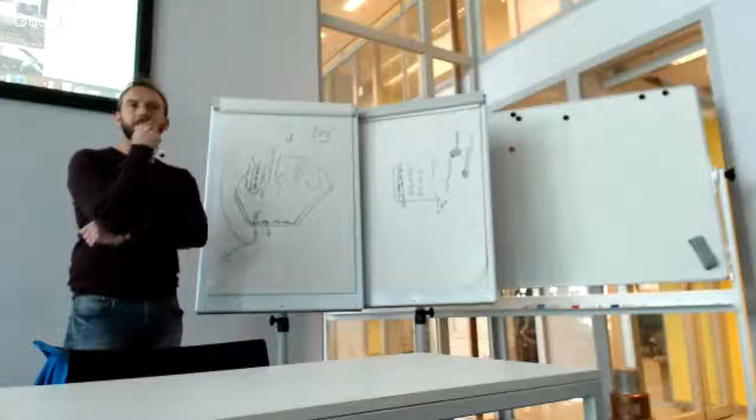Any other thoughts about what type of measurements would be good, especially to measure the water content, or a combination of measurements? The water content, you have this NMR or what is it? Yeah, NMR kind of thing in the non-saturated zone. That shows you, gives an indication of permeability, of the medium also.

NMR, which is nuclear magnetic resonance. Does it? Yeah, I know it in the laboratory. Protons get flipped and then they spin and relax. Yeah, no, I know the principle. I know you have these big reactors in the laboratory, but I don't know how you do it in the field.

They do it in the oil industry for that. It costs a lot of money, one tool is $1.5 million. But I'm sure they have it. The Danes, they do it also. They have a surface NMR system.

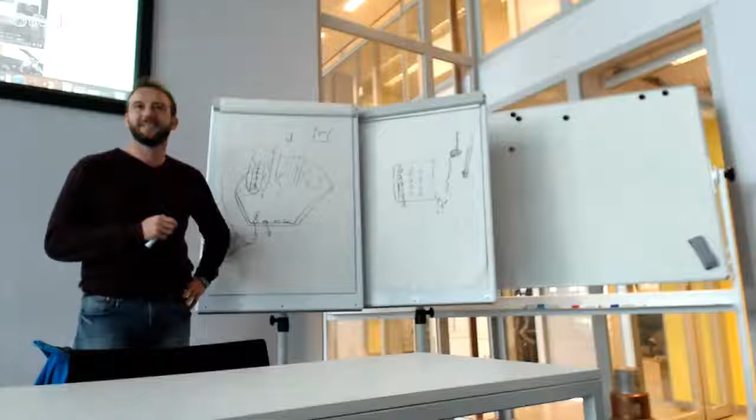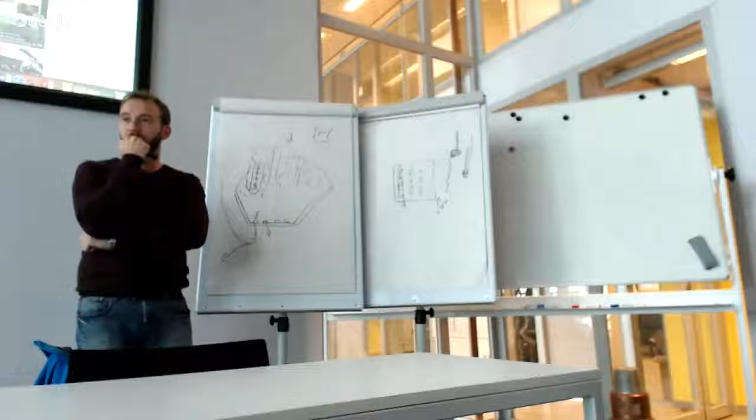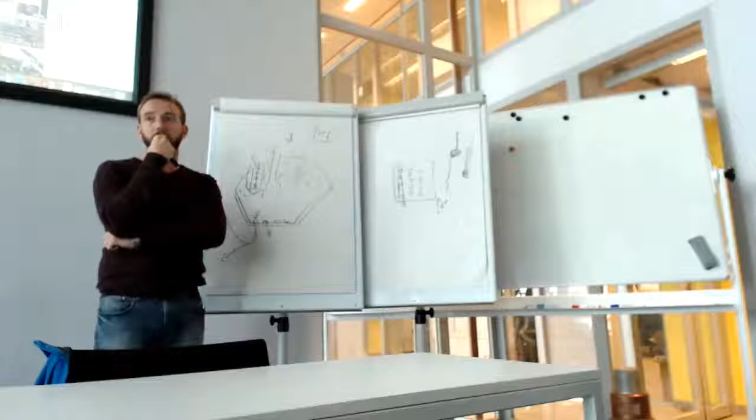In soil science, yeah, I think these guys are the ones who- anyway, thank you for your input as well. If you do have a paper or two about the background of this, that would be really interesting. Yeah, there are also some reports, some papers, I can send it to you.

Yeah, definitely, there's so many of them, and there's some really interesting problems. We're just setting up the industry, so we're also very open to collaboration, or if other groups want to also use it as a test site.

They are here for an hour, so- Well, that's perfect. Thanks very much.